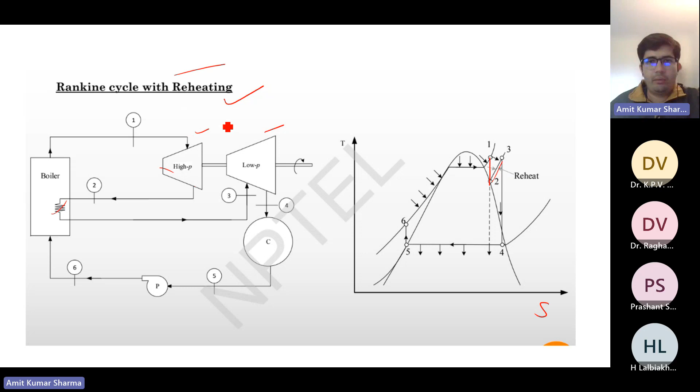So in this way, you can see from 1 to 2, the high pressure turbine is developing work. From 2 to 3, we are again reheating the steam and then again we are producing work from the low pressure turbine. So in this way, we are doing reheating at high temperature. So initially we are going from the lowest temperature, but in reheating, in between at some pressure, we are again reheating the steam

and producing the work. So it is having some benefit on efficiency and also for equipment, because suppose if you are coming directly down, then you will be somewhere here. And in this region, you can see there will be more part of water. So this is not good for the turbine and all. So you should be near the saturation region because it will be good for the equipment also. So reheating is having benefit on efficiency and for the parts life.

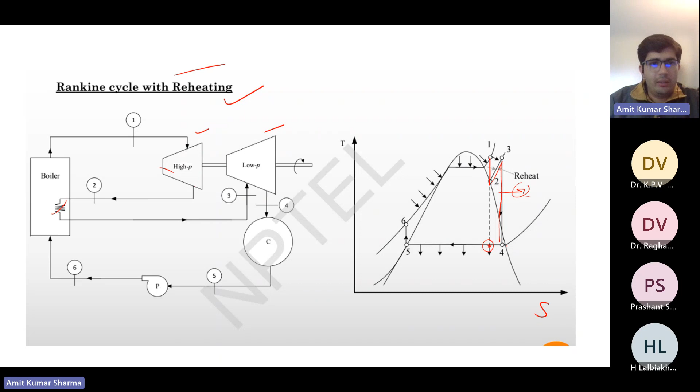So let's come with some numericals. Okay. So the first one is: choose the correct option regarding the combined cycle for the maximum efficiency. So we have to choose the correct option regarding the maximum efficiency. Yeah. So take 2 minutes and come with a good reasoning for your answer.

So the first option is the heat rejected by the topping cycle is the heat supplied to the bottoming cycle. The heat rejected by the bottoming cycle is the heat supplied to the topping cycle. More work is done by the topping cycle. More work is done by the bottoming cycle. Maybe you can link up with the answer. Option C, sir. Option C. Okay. We will come to discussion. Just wait for a moment.

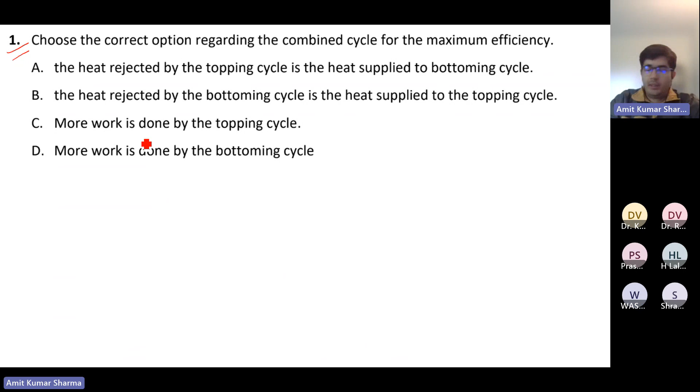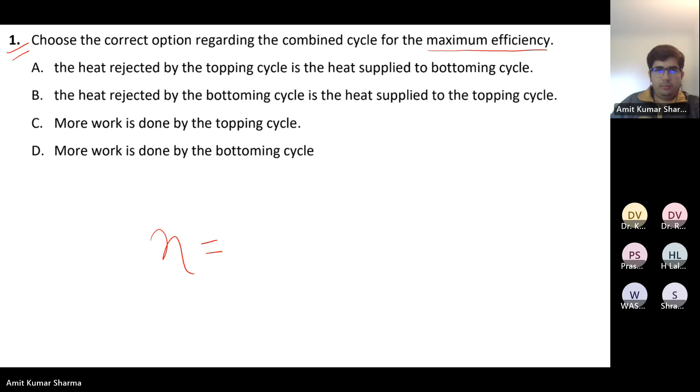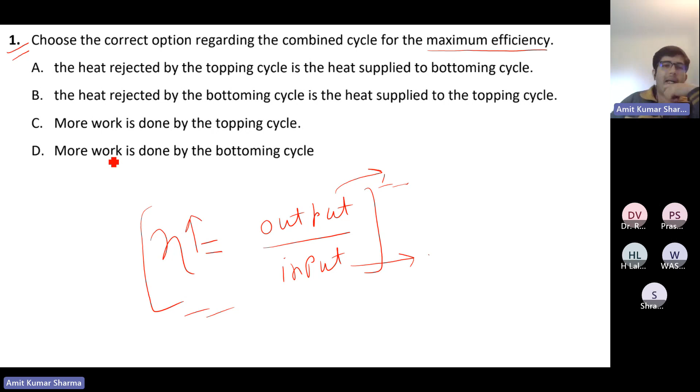So what are the ways to increase the efficiency? What is the basic meaning of efficiency? Anyone? Output upon input. Yeah. So the very basic definition of efficiency is output upon input. So it says that we have to increase our output with the input. So if I want to increase my efficiency, either I can increase my output, then my efficiency will increase, or I can decrease my input, then my efficiency will increase.

So we are having two options. Either we can increase our output, or we can decrease our input, or we can do both. Then it's a good thing. Okay. So basically efficiency is saying how much output we are getting from our input. So we have to maximize efficiency. It means that we have to increase the output work and we have to decrease the input.

So anyone want to answer? Anyone else have any options? We are having one answer as option C. Anyone else having any option in their mind? Please let the class know. A, sir. Option A. Okay. So we are having two answers, A and C. So let's come with the first answer, C. Please explain your reasoning for answer C.

Sir, the more work done by topping cycle means the main turbine is there, the main turbine is high pressure and high temperature. So getting more work done from the topping, in the main HP turbine. Okay, so you are saying that there should be more work in the topping cycle. Topping cycle I think is the main cycle. Suppose this is cycle 1 and this is cycle 2. Just a simple diagram. So 1 is the topping cycle, 2 is the bottoming cycle. So you are saying that there should be more work done in the topping cycle.

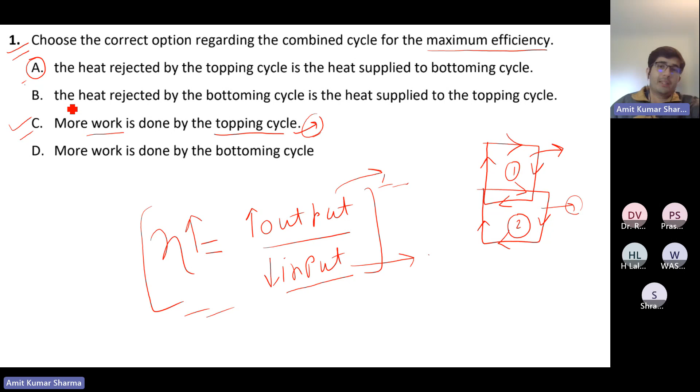But if you are getting more work done in the topping cycle, then it's obvious, because the topping cycle is having some efficiency, that for more output you have to increase the input. Because to increase the efficiency, what are you doing? You are inserting a bottoming cycle. So if you are increasing the work done in the topping cycle, you have to supply more input. Then only you can get more work done, because work is high grade energy. From the topping cycle you want more work, then there should be more input also. So I think this option is not correct. Anyone else?

Okay, now come to option A. Please explain your reasoning why option B or D is wrong, because we have already discussed option C. So who is saying option A? Please explain your reasoning behind B and D, why they are wrong.

My name is Prashant, sir. Actually, what happens in option A is we receive the input in the first complete cycle, which remains constant throughout. For the second, bottoming cycle, no separate input is required; whatever is rejected from the topping cycle is supplied to the second. So there is no input for the second cycle. In this case, we are only minimizing our input, so getting maximum work.

So though there are two cycles, input comes only in the first, the topping cycle, and for the second there is no extra input; whatever we get is from what is rejected. So in that way, I think A may be the right answer. Your answer is very correct, but you forgot to mention the main thing.

This is called waste heat recovery. You explained everything, but you forgot to mention the word 'waste heat.' Actually, I forgot, sir. Yeah, so that is what this class and course is about — maximizing our efficiency using waste heat recovery.

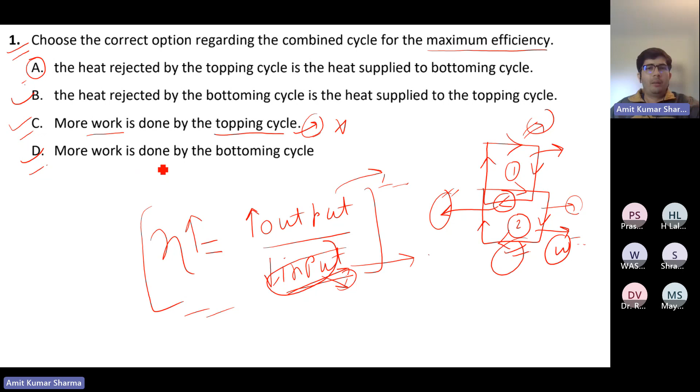As I told you earlier, we can increase efficiency in two ways: either increase output, or decrease input, or do both. Here we keep the input the same but increase output by combining two cycles. So the correct option will be option A, because the heat rejected by the topping cycle is the heat supplied to the bottoming cycle.

Now what is option B? The heat rejected by the bottoming cycle is heat supplied to the topping cycle. That's totally wrong, because the bottoming cycle is totally dependent on the topping cycle. And what is option D?

More work is done by the bottoming cycle. As you know, in the bottoming cycle we are not giving any input, so the work output from the bottoming cycle is limited. We cannot control that — we can only control the input waste heat from the topping cycle. So we cannot say this option is correct, because it depends on the topping cycle.

How much heat is rejected in the topping cycle decides the work output from the bottoming cycle. If we use a bottoming cycle and get any work output, that is our bonus — because if there were no bottoming cycle, you'd have only a single cycle with the same input. But with a combined cycle, any amount of work, say 5% or 10%, that comes extra is a bonus. So there's no question of 'more work' from the bottoming cycle being guaranteed; we cannot control that, that's why we cannot say it.

So the only correct option will be option A. Any doubt?

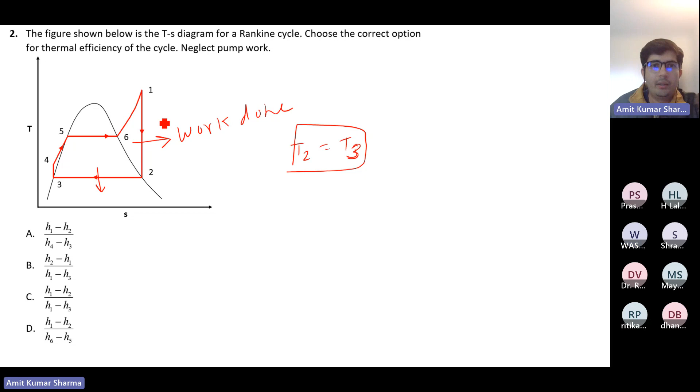Okay, so what is happening here? Is even the heat exchange a heat rejection, sir? Heat rejection is there because at point 2 to 3, point 2 is the vapor phase, and they release the latent heat through the condenser. So this is cooling, and it goes into water, converted to water.

So I was waiting for this point, latent heat. So the vapor is losing its latent heat of vaporization from 2 to 3 and converting to water. So this latent heat is important, so the temperature remains the same. It is required for phase change from vapor to liquid or liquid to vapor. Okay, this is a very important point. So this is heat rejection.

So then 3 to 1 - because we have been given to neglect pump work, this 3 to 4 is basically the pump work, but we have to neglect it. Then what does 3 to 1 represent?

3 to 1, what is it representing? What is the process 3 to 1 representing? It's heat addition, the boiler. Yeah, it's basically heat addition. So this is complete because we have been given that we should neglect pump work, that's why we are considering the complete process from 3 to 1.

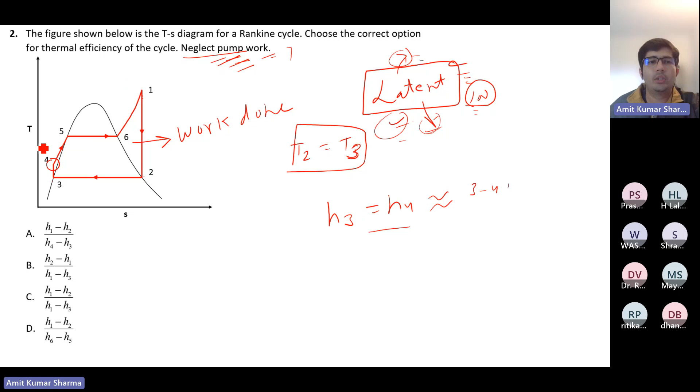But in actual conditions, it should be H4, it should be point 4 only. But it is given in your question to neglect pump work, and there is no option with H4 also. That's why, if there is an option with H4, then you have to consider H4 only.

Because sometimes we have to look at the options also, to see what options we are having. So you can approach it from the options actually.

So the efficiency will be output upon input. The output is the work done from the turbine, and the input will be the heat addition. So output will be the enthalpy of point 1 to 2, H1 minus H2. So see the option with H1 minus H2.

In option A we are having H1 minus H2, and also option C and option D. So maybe option B is directly wrong, because H2 minus H1 doesn't make sense - the enthalpy of this is more as compared to this.

Okay, so H1 minus H2. So the answer could be A, C and D. Now see the input, input should be H1 minus H4. But no, we have no option of H1 to H4. So we have given neglect pump work, so maybe we can consider H3 equals to H4. So replace H4 with H3. So option C with H1 minus H3. Yeah, there is option C. H1 minus H3. So the correct option will be option C.

Any doubt? No sir, I think no doubt. Let's come to question number 1.

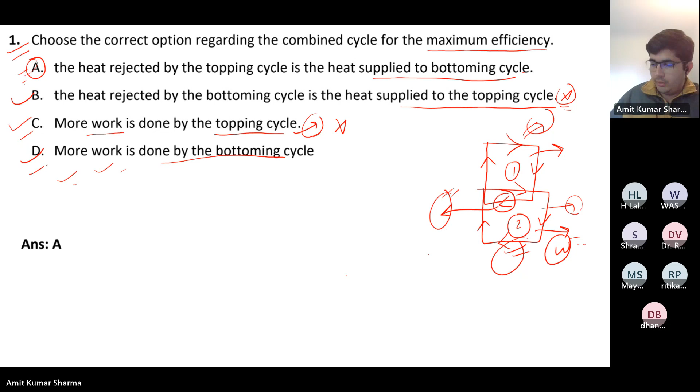If they produce more work, efficiency is more. I think you have to consider, if you are producing more work in topping cycle, because most of the power plants are using this thing only. Let me clear this. As I already said, efficiency is output upon input, so you can increase the efficiency either by increasing the output or decreasing the input.

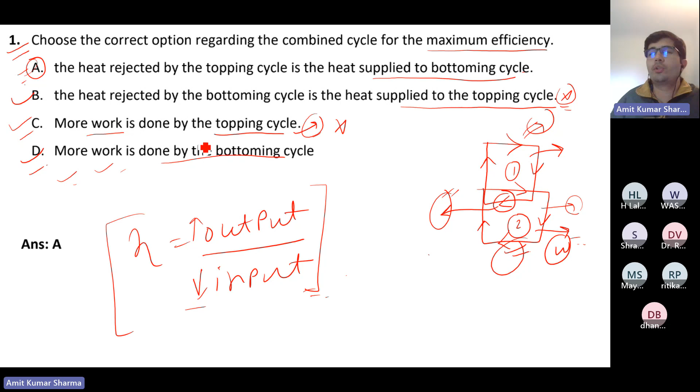So I think you are referring to option number C, that more work is done by topping cycle. Yeah, if you produce more work in any topping or bottoming cycle, efficiency will increase for sure. What you are saying is correct, we can produce more work in topping cycle also, but you have to see the question.

What is the question asking you? The question is clearly mentioned regarding the combined cycle. So first of all, you have to limit your thoughts to the combined cycle only. Now you have to think that you are having a combined cycle, and for that combined cycle, you have to increase the maximum efficiency. Then what can you do? So the best option in combined cycle is to use the rejected heat of topping cycle to supply heat to the bottoming cycle.

Suppose if you are producing, let me go with your option, more work in topping cycle, yeah it's fine. But still there is some heat in the topping cycle that can be used to produce further more work in bottoming cycle. So the question is asking about combined cycle, it's not about only the topping cycle, it's about the combined cycle. So to increase the efficiency of combined cycle, you have to utilize your waste heat, you have to recover the waste heat in bottoming cycle. That's the only way to maximize the efficiency of combined cycle.

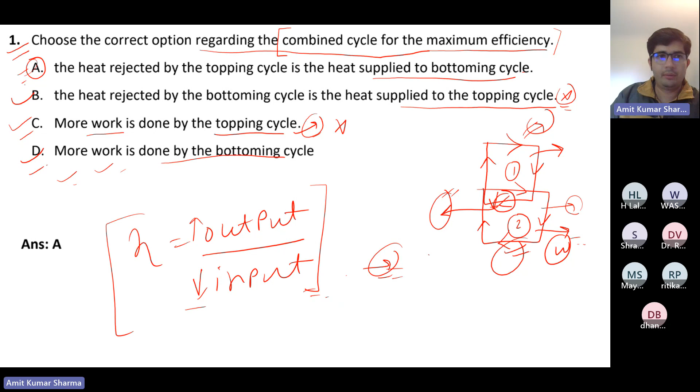Okay. So in this question, answer is A. Okay, so question number 3.

Choose the correct statement or statements related to the Rankine cycle. We have given 5 statements, we have to select the correct one. First is irreversibility causes an increase in pump work. Second is irreversibility causes a decrease in turbine work. The pinch point puts a restriction on the highest achievable temperature. The terminal temperature difference point put a restriction on the lowest achievable temperature. Irreversibility does not affect the Rankine cycle. So take 2 minutes, we will discuss it.

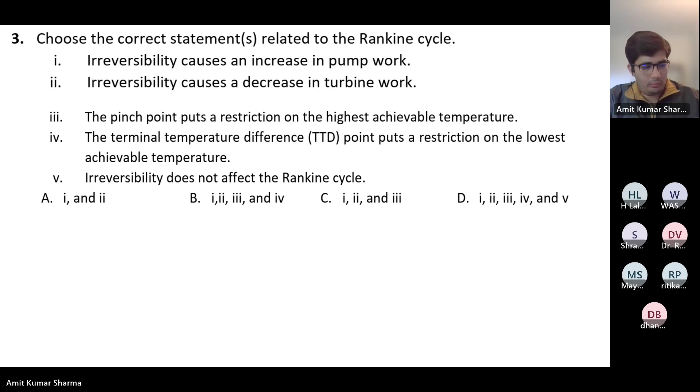So some minimum is required. And for the temperature difference, when the vapor phase is there and you want to fully convert the vapor phase, the size of the condenser increases, and the flow of water also increases. And the fifth, irreversibility does not occur, is wrong. Okay. Correct. Nice.

So the correct option is B, and all your points are correct. So let's discuss it. The first point is irreversibility causes an increase in pump work, because the pump has some efficiency, some friction, some mechanical parts. So there will be various irreversibilities.

If we go for the ideal reversible case, then should the pump work be minimum or maximum? Minimum, sir. Because with the pump we are giving some work, some energy. So due to the efficiencies, due to the irreversibilities, we have to provide more work.

Suppose we want to get an output of 10 kilojoule from the pump; maybe you need to input 15 kilojoule, because the irreversibilities will account for the 5 kilojoule. So you have to provide more work: the more the irreversibility, the more input needed. If irreversibility increases, maybe you have to input 18 kilojoule, maybe 20 kilojoule.

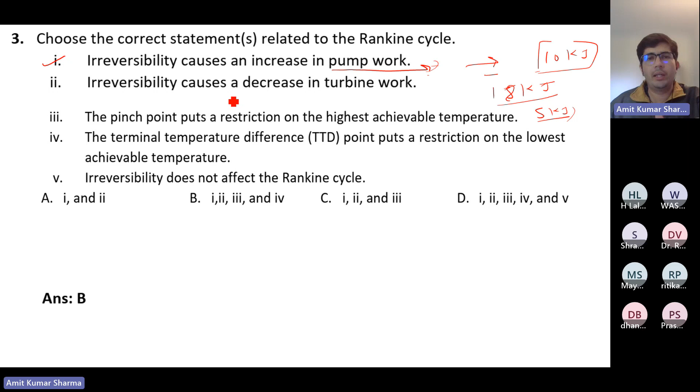So it depends on the efficiencies of the pump. There will be mechanical efficiency, isentropic efficiency, and some other efficiencies depending on the bearings and the frictions; many mechanical parts are there. So it depends on the age of the pump also. Due to those, efficiency will be affected, so you have to take that into consideration. So yeah, option 1 is correct: irreversibility causes an increase in the pump work.

Irreversibility causes an increase in the pump work. Now, irreversibility causes a decrease in turbine work. The turbine is basically the output work. Suppose there is no friction and everything is reversible, there is no loss in the system. Then we will get, suppose, 10 kilojoules.

But we are using some mechanical equipment, so there will be friction. Each component has its own efficiency, every part has its own limitation. Due to these limitations, due to these irreversibilities, we will get only 8 kilojoules, maybe 7 kilojoules. So we are getting less work. Due to irreversibility, the work output is decreasing. So irreversibility causes a decrease in turbine work.

The pinch point puts a restriction on the highest achievable temperature. The pinch point is basically a minimum temperature difference that will always be there. Suppose this is the heat transfer diagram. There is a point, the pinch point, which is the point of minimum temperature difference. You cannot go beyond this difference. So it puts a restriction on the highest achievable temperature; we can go up to that point only, so our heat transfer will be limited.

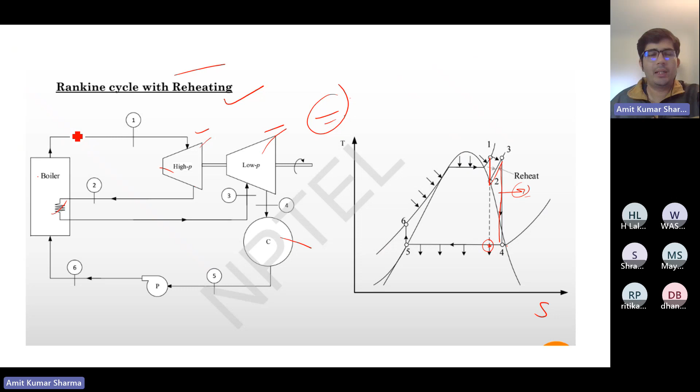If you remember, we discussed at the start the Rankine cycle with reheating. There is a high pressure turbine, a low pressure turbine, a condenser, and a boiler. So in this way, we are representing this cycle in the TS diagram.

So the 1 to 2. This 1 to 2 is the work production in the high pressure turbine. Expansion in the high pressure turbine. Yeah. So 1 to 2 option, expansion in the high pressure turbine. Yeah, this one. So 1 to 2 will go with the 4.

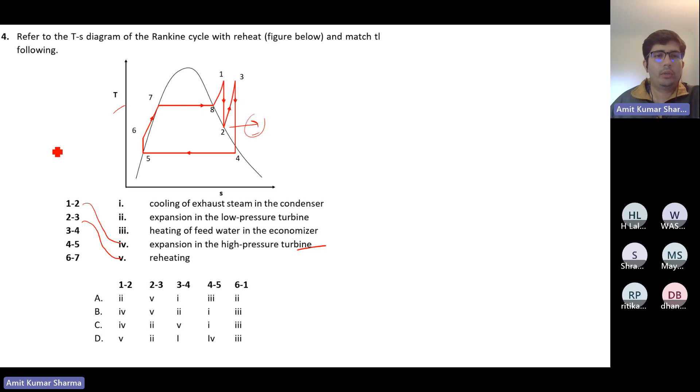Then 2 to 3. Again, you can see the temperature is increasing from 2 to 3. So it means that we are reheating it. We are increasing the temperature from 2 to 3 again, so 2 to 3 will be reheating. Then 3 to 4. Again, we are expanding the steam to produce work. It will be in the low pressure turbine. So 3 to 4 will be expansion in the low pressure turbine. Okay.

Then come to the 4 to 5. As we have discussed in our previous questions, we are converting the vapor phase to liquid phase. So 4 to 5 will be cooling of exhaust steam in the condenser. We are doing the cooling. Then 5 to 6 will be pump work, but we are not having a 5 to 6 option here. We are having 6 to 7.

So 6 to 7 is what? 6 to 7 is heating of feed water in the economizer. So basically this 6 to 7 is the economizer, then there will be the boiler. And completely, 6 to 1 is heat addition, and again 2 to 3 is heat addition. So this 3 to 4, this 6 to 7. Okay, but it's mentioned 6 to 1 here. So you can say it's complete heating, heating of feed water in the economizer.

So option B is matching with all the statements. So the correct option will be option B. Is it clear? Anyone having any doubt?

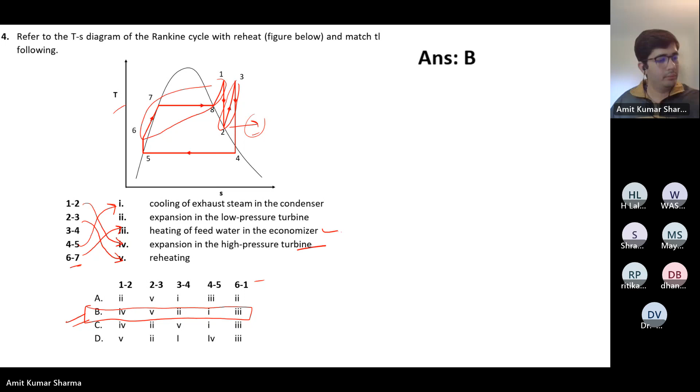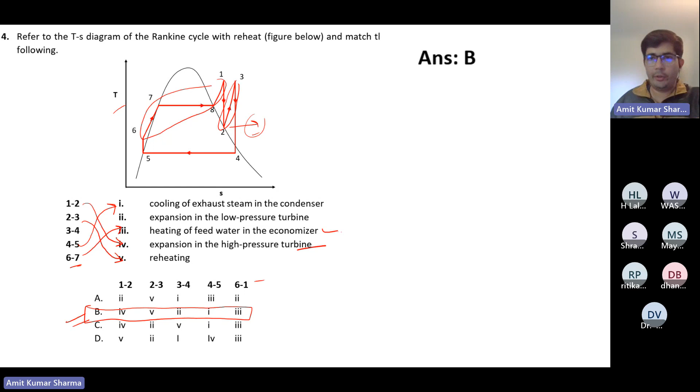Is anyone having any doubt? Okay, I think it's clear to everyone. Am I audible? Yes, sir. Okay, thank you.

Okay, question number 5. Which one of the following is the correct order of fluid flow in a steam power plant? So you have to identify the correct order of fluid flow. Go through all the options. Option D, sir. Option D. Okay. We have two answers. Let's wait for maybe another minute.

So we have to identify the fluid flow in a steam power plant. Sir, D. Okay, option D, we have another answer. So let's see, the correct answer is D. Yeah, you all are correct. We know the fluid flow is: first we do heat addition, then we expand it, then through the condenser, then through the pump, and then again heat addition.

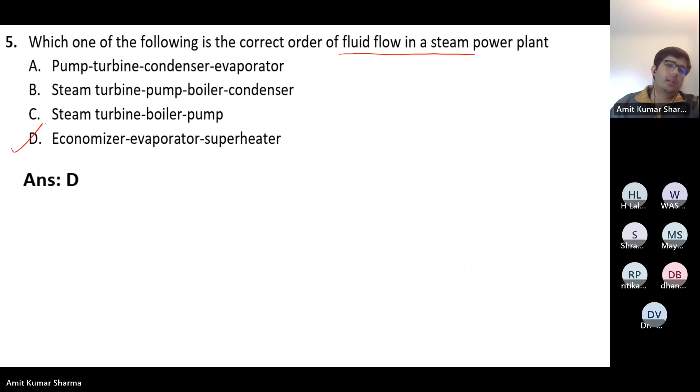Then steam turbine, boiler, no. Without a boiler, how can you generate the steam? So the boiler should come first. Option C is also wrong. Then economizer, evaporator, superheater. It seems correct. So option D is correct. I think it's clear to everyone. Any doubt? Okay.

The open feed water heater is: take 1 minute to answer. Option A, indirect contact heat exchanger; B, direct contact heat exchanger; C, neither direct nor indirect contact; or D, storage type heat exchanger. Direct type heat exchanger. Direct contact heat exchanger. Okay, let's wait a few minutes.

Indirect contact heat exchanger. Okay, so we are having two options, so there is going to be a discussion. Good. Anyone else? So it is B, direct contact. Okay, so we have a third answer, direct contact heat exchanger. We are having 2 votes for B, 1 vote for A. Anyone else? Okay, let's first start with option A. Please explain your reasoning.

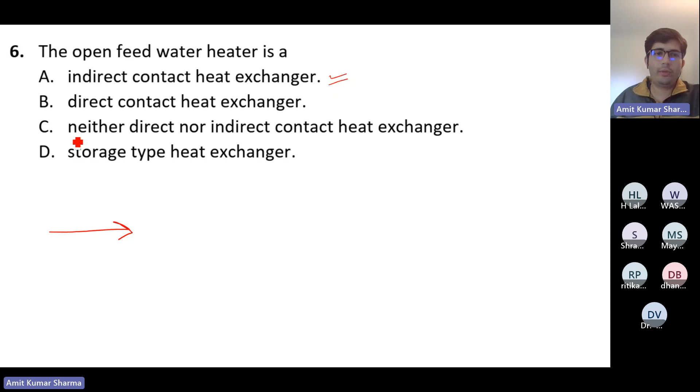Direct contact is a mixing of the two fluids. Is it correct? Yeah, direct contact is simply mixing. So suppose there is a heat exchanger in direct contact, because there is a stream of fluid A and one stream of fluid B. Fluids are in contact. So A may be at high temperature and B is at low temperature.

So in direct contact, you mean to say both stream A and stream B will mix together, and then there will be stream C. Is it correct? Yes, sir. Okay. And in indirect contact, stream A is flowing through some pipes, or stream B is flowing separately. So they are not mixing in between the heat exchangers. After that, there will be maybe some connection to mix those. So for the heat exchanger area, suppose in this area heat is exchanging, it means there is no contact between stream A and stream B in indirect contact.

So the meaning of indirect here is that the heat is exchanging, because the hot stream is releasing its heat to the cold stream. So the hot stream is losing temperature, the cold stream is gaining temperature, but there is no direct contact between them. They are going through their separate pipes, or maybe tubes, or maybe some other mechanism.

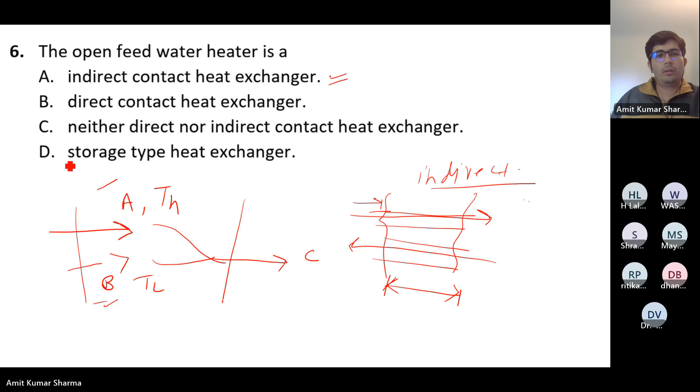But in direct contact, suppose this is the area of our concern. So in this area, the heat exchange is taking place. So what is happening here? Both stream A and B are coming here, and they are mixing together. After mixing, there is another stream C. So that is the result of the heat exchange. So they are directly coming in contact. So that is direct contact.

So here it is mentioned open feed water heater. So basically there are two types of feed water heaters, maybe multiple types, but I think we have discussed two types in the class: open feed water heater and closed feed water heater. So in open feed water heater, there is direct contact of the steam and the condensed liquid. So basically the hot stream and the cold stream will be in direct contact. In closed feed water heater, there will be no direct contact, there will be indirect contact.

So they will be passing through either tubes, or maybe one is passing through the tube and another is hitting outside the tube. So there is no direct contact. So that is the closed feed water heater. In open feed water heater, there will be direct contact. So the correct option will be option B. Any doubt? Okay.

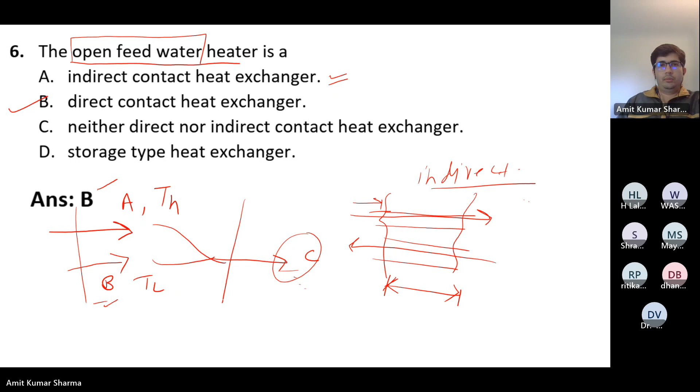Choose the incorrect statements. So you have to choose the incorrect statements. Those who are new in NPTEL classes, if any question is like this, it's not necessary that only one answer is correct. More than one option can be correct. So you should remember this in your exam and in your assignments also. The motive is that you should know the reasoning for every right answer and every wrong answer. So you should understand why the answer is wrong and why the answer is right.

So suppose you are going through the options and you see option A is correct. You directly mark option A. That's correct, but maybe option D is also correct. Maybe there are two answers, A and D, but sometimes it will not be mentioned in the question whether it's statement or statements. Here it is mentioned as incorrect statements. So more than one answer can be correct, and even if in some question it is not mentioned, more options can still be correct. Go through the options, take 2 minutes, then we will discuss.

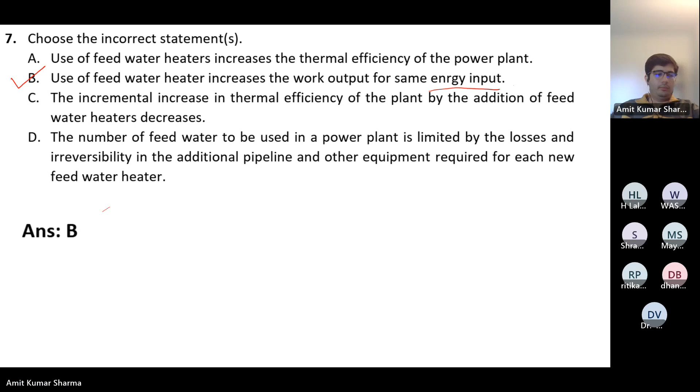I think in option C we have already explained it. So option D is also a correct statement. Okay, so the correct answer will be option B only. So the incorrect statement is only option B. Anyone having any doubt? Okay.

So choose the correct statements for reheating in the Rankine cycle. So take 1 or 2 minutes. Option A is it has the benefit of getting high quality steam at the condenser inlet. Option B, it always increases efficiency. Option C, it increases work output. Option D, none of the above. Let's take 1 more minute, go through all the options.

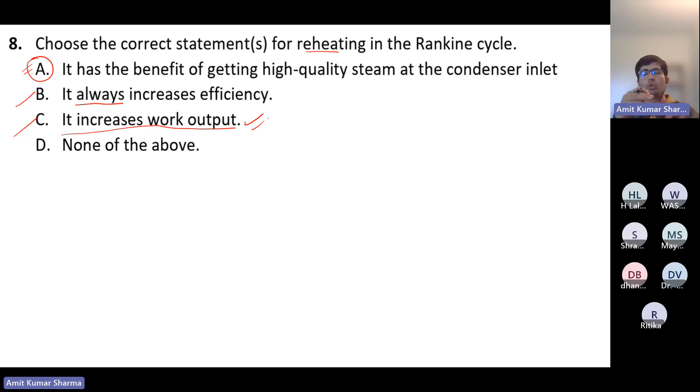Okay, now come to option A. Sir, I think everyone knows the answer, but they are just confused about the high quality steam. They are confusing that high quality steam is only steam or superheated steam, but that is not the case. So let me draw a simple diagram.

Suppose this is point 1. Okay, so it is without reheating. If I use the turbine for expansion, suppose I am using the ideal case, so it will come here. Suppose this is point A. Now I am doing some reheating. Then what will happen?

Sorry, let me just redraw it. Suppose this is point A. Okay, so I'm directly coming to the expansion, so this is the point we are getting. So if I'm not doing reheating, I'm coming from point 1 to point 2.

Now, if I am doing reheating, what is happening? I'm expanding it here, then again reheating, then I'm coming to point 3. I'm again doing expansion, and I'm coming to point 4.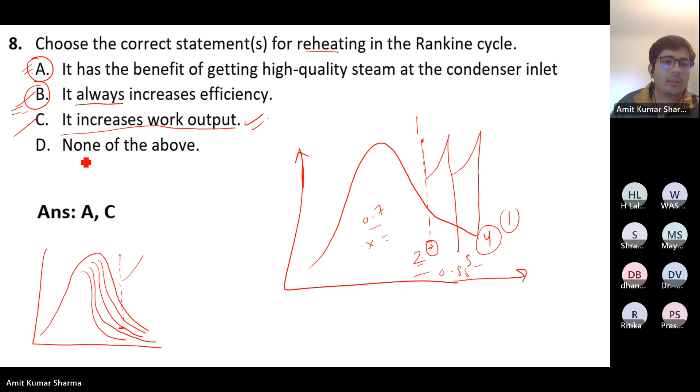Okay, so if you are doing the reheating, in one case suppose your point is at 1. Yes, sir. So you are not doing any reheating. Then what will happen? Maybe you are coming up to this point. Okay, maybe this curve may be the same, 0.7. Now you are doing some reheating. Then where are we coming? Here. So what is happening at this point? Is the dryness fraction increasing or decreasing?

Sure, if you are again reheating, you are coming at the saturation curve. What is happening here, you can see now. So the dryness fraction will increase. You can say directly. Okay, means dryness fraction depends on condenser inlet temperature. Okay, thank you. We are looking at the condenser inlet temperature, so we tried so that there will be less moisture at the inlet. Yeah, I understood. Okay.

Yeah, anyone else? Anyone have any idea why we are focusing so much on the moisture? Suppose the condenser... let me complete. As we are already converting the steam into liquid in the condenser, then why is the quality of steam important at condenser inlet? Anyone want to focus on that? Why are we focusing on the quality of steam at condenser inlet? I am saying again and again that there should be less moisture at condenser inlet. Why so? What is the reason?

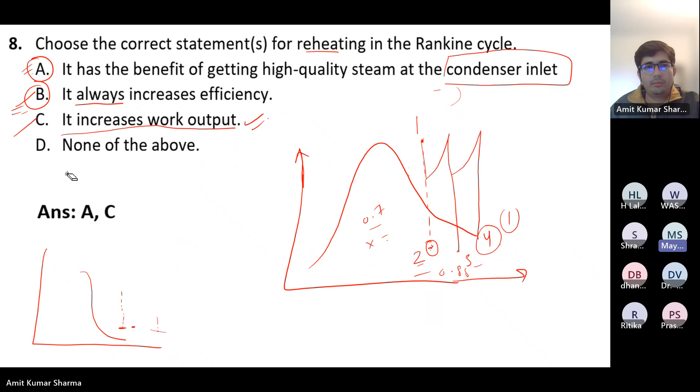Yes, sir, because the condenser itself is a kind of heat exchanger. So we have to maintain some temperature difference between the incoming cooling liquid, like seawater or whatever cooling water it is, and the incoming steam. There must be some temperature difference so that the heat transfer can take place.

I don't think so, because in the condenser we are converting it to completely liquid. So suppose at the condenser inlet there is less moisture, but what will be the condenser outlet? That is completely liquid. So what is the reason behind less moisture at condenser inlet? You are getting my point? You are saying that is correct in that manner, but I am asking why the quality of steam is important at condenser inlet. Why are we focusing on that part?

Because in the condenser, at last what is happening? Suppose the condenser is 10 meters long. So at the starting point, 0 meter, there is no moisture. But what will be there at the end of the condenser? There will be completely liquid. So basically the 10 meters is having some part liquid, some part moisture. Only at a particular point there will be steam. After that, suppose the dryness fraction is 0.9, meaning there is moisture. At 0.8 there is moisture. So the complete condenser is having some moisture, and also we are flowing cold water outside. So why is the condenser inlet steam quality important?

It's a very good point. Yeah, anyone wants to address it?

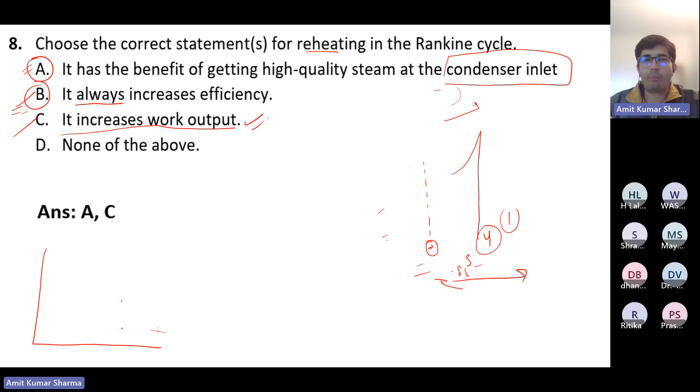Sir, due to avoiding the corrosion problem in the tube, at the turbine outlet.

Yes, that's what I want to hear. Turbine outlet. Actually, we are not focusing on condenser inlet, we are focusing on turbine outlet. But we are saying condenser inlet, because if there is moisture at the turbine, what will happen? That moisture particles will damage the turbine blades. Because turbine blades are rotating at very high RPM, and if some water bubbles are there, those water bubbles will strike the turbine blades. You can see the complete detail in some reference book. So that can damage the turbine blades.

So sir, it will cause pitting and corrosion. Yes, pitting and corrosion. So that is the point. So turbine blades will get damaged. We are focused on turbine outlet, but we are saying condenser inlet, because the condenser inlet is the point of turbine outlet. I think now it's clear to everyone.

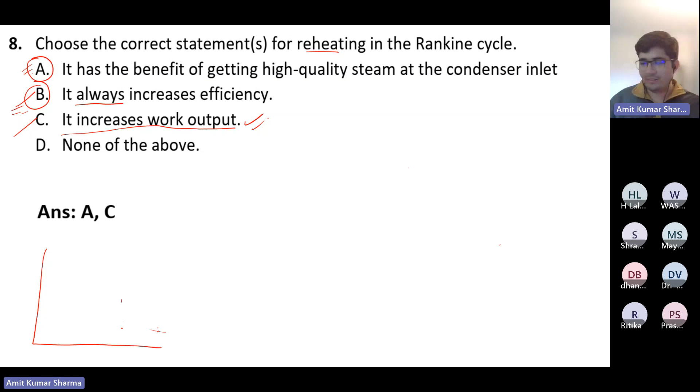So a quick numerical. Given below is a Rankine cycle with reheat. The table below gives the properties of the working fluid at important points. Point 5 corresponds to a saturated liquid coming out of the condenser at 10 kilopascal. Steam enters the high pressure turbine at 15 megapascal. The specific volume of saturated liquid at 10 kilopascal is 0.00101 meter cube per kg. We have given some data. So what will be the pump work?

Take 2-3 minutes and try to answer. Always remember, be very careful with the units, because we are having some units in kilopascal, some in megapascal. Always be very careful with the units. Also, we are having enthalpy in kilojoule. Units are very important whenever you're solving, because in the options you can see option A is 15.139 and option B is 151.39. So there is only a difference of a digit. Similarly for option C and D also. So units are very important.

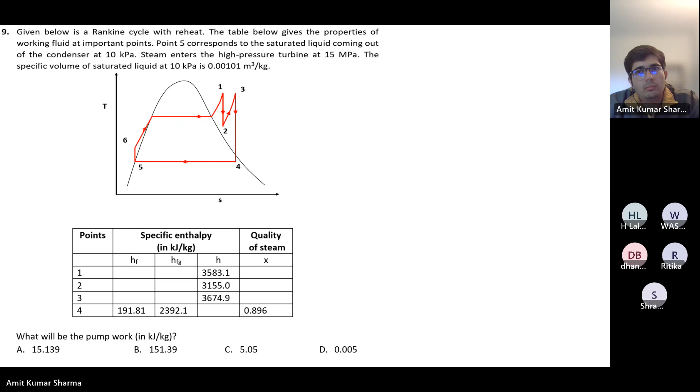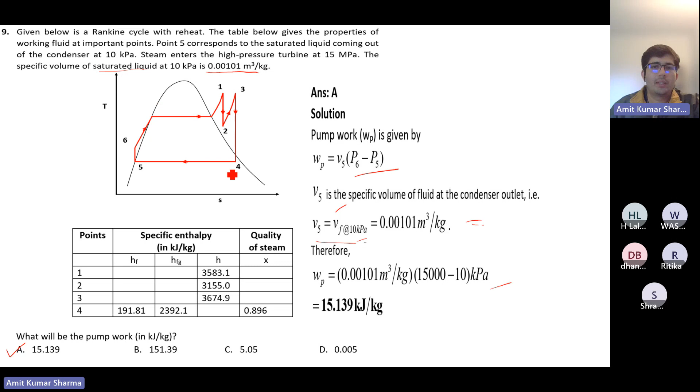Okay, so let's see the solution. Option A is correct. The correct option is option A. So what is the pump work? Pump work will be V5 into P6 minus P5, the difference between the pressure at point 6 and point 5, and the specific volume of the fluid. So V5, we have given VF at 10 kilopascal. In the question, saturated liquid is 0.00101 meter cube per kg. So WP will be V5 into P6 minus P5. We have given the pressures, so put them in kilopascal, you will get the answer in kilojoule per kg.

For detailed numericals on Rankine cycles, you can refer to the class videos. I think professors have solved very good numericals in class also. Anyone having any doubt?

Okay. One important thing is there, because sometimes many students got confused with the steam table. They will see various points are there. Okay, so don't confuse with it. They are asking only the pump work. Okay, so you have to only focus on point 5 and 6.

Don't bother about the table. You don't need it. Okay, you only need point 5 and 6. So only see the relevant data, only find the relevant data and start solving. Don't think about the other things. Okay. Any doubt?

Okay. So consider problem 6. What will be the total heat supplied? Again, the same question. Let me wait a moment. Yeah, same. So now you have to solve the same numerical. Just find out the total heat supplied in this question. Now you have to use the table, because now you have to focus on which points.

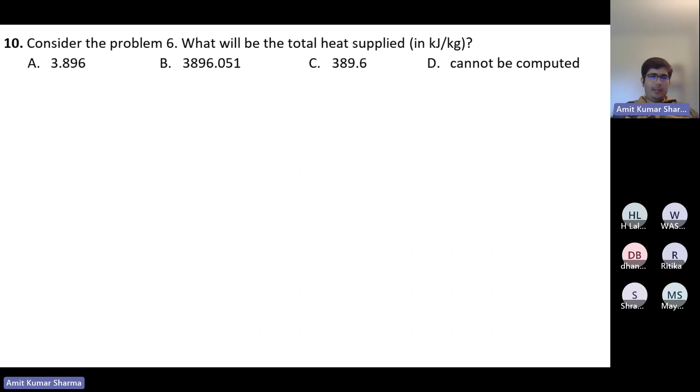We have been given the enthalpy of states 1, 2, and 3. We can see that the enthalpy of state 6 is not given, so we have to find that. For enthalpy at 6, first we need to find the enthalpy at 5. Enthalpy at 5 plus the work of the pump gives enthalpy at 6. Enthalpy at 5 can be found from the curve because we know that 5 is at the saturation point.

So H5 is that of the saturated liquid at the condenser outlet, the enthalpy of the liquid at 10 kilopascal. It will be 191.81 kilojoule per kg. And we know the work done. For H4 we have given HF, but H5 we know is at the point on the curve, so H5 will be the HF that we have given here. So H6 will be 191.81 plus the pump work.

So it will be 206.949. Okay, so now we have H6, and we have H1, H3, and H2 already. So the heat addition will be H1 minus H6 plus H3 minus H2. That will come to 3896.051 kilojoule per kg. So the correct answer is option B. Anyone is having any doubt? Okay, I think there is no doubt.

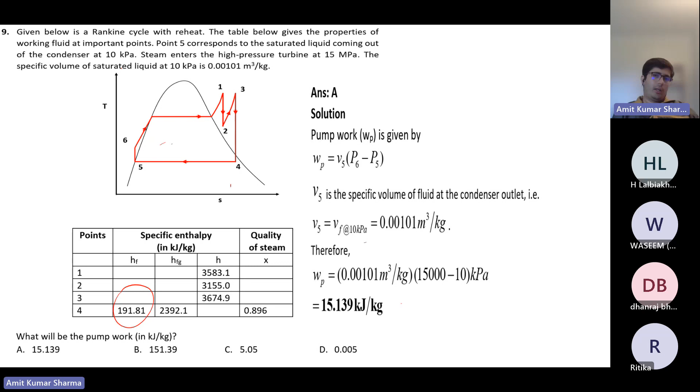Yes, sir. Okay. So question number 11, again consider the same problem. What will be the thermal efficiency of the cycle? Now you have to find out the thermal efficiency. I think you have found out the heat addition. For thermal efficiency, you need to find out the work output. So consider points 1, 2, 3, 4 and find out the work output from this data. After the work output, you can find out the efficiency. You know the pump work, you know the heat addition.

Take 2 minutes to solve. This one question has 3 questions, okay? With the same data, we can solve 3 questions. So it's good to practice these types of questions, because you have to be aware of them.

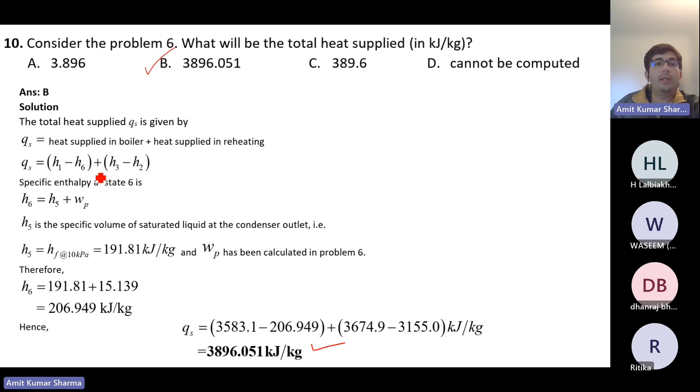So let's see the solution. Thermal efficiency is the net work output upon the total heat supplied. We computed the total heat supplied in the last problem: 3896.051 kilojoule per kg. Now the net work output. The work output will be the output from 1 to 2 plus 3 to 4 minus the pump work 5 to 6.

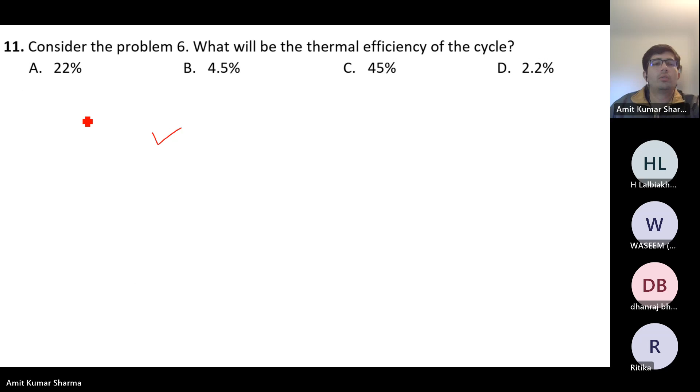So it will be WT1, high pressure turbine, plus WT2, low pressure turbine, minus pump work, where WP is the pump work. So W net will be H1 minus H2 plus H3 minus H4 minus WP. Enthalpy H4 will be HF at 10 kilopascal plus X4, the dryness fraction, times HFG. So we get the enthalpy 2335.1316. Then W net will be 1767.87.

So you have the net work output and the total heat supplied. The answer will be 1767.87 upon 3896.051, which comes to 45%. Okay. Yeah. Come to the next question.

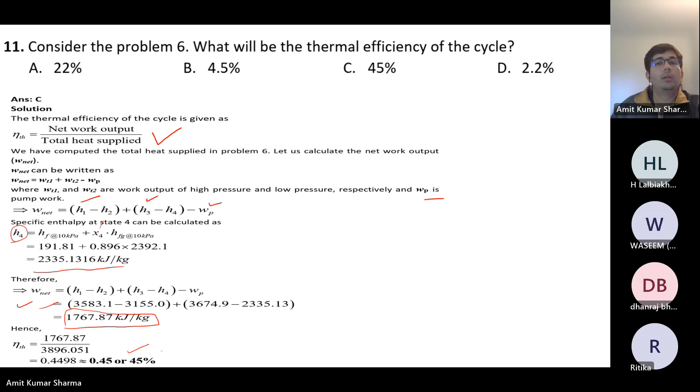In an adiabatic turbine, the steam expands steadily. The data is given in the figure. What is the power output of the turbine in kilojoule per kg? Note the inlet and outlet of the turbine are at the same datum. Same datum means you have to consider the potential energy as 0.

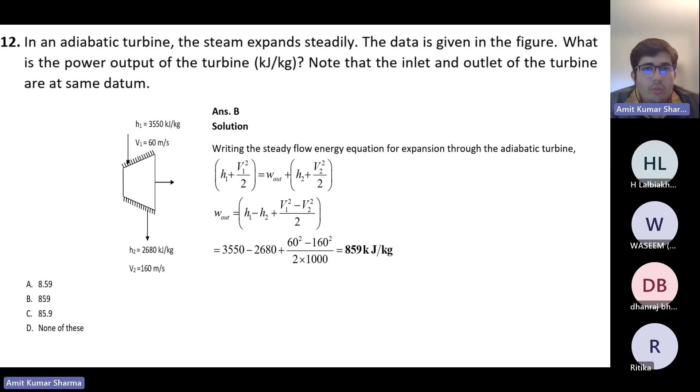So we have to first write the steady flow energy equation for expansion through the adiabatic turbine. That will be H1 plus V1 square by 2. We have to consider the kinetic energy because we have been given the velocity at inlet and outlet, and the enthalpy and the work output. Okay, so W out; it's adiabatic, so there is no heat loss, so Q will be 0. So put in the steady state equation, you have all the data.

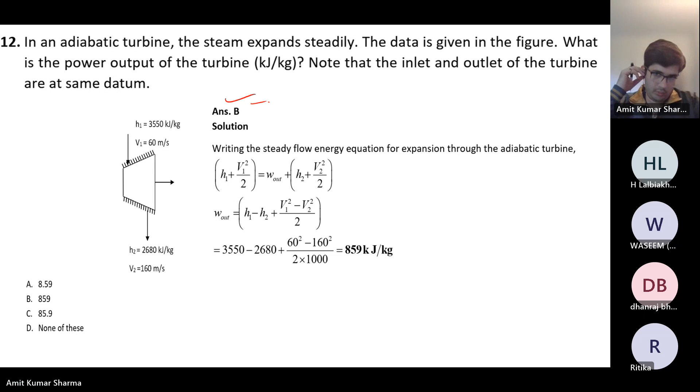So W out will be H1 minus H2 plus V1 square minus V2 square upon 2. The answer will be 859 kilojoule per kg. So the correct answer is option B. Is it clear? Okay, I think it's clear to everyone.

Question number 13. The figure below shows the TS diagram of a steam power plant based on a Rankine cycle. Find out the back work ratio. We have been given state points, specific enthalpy points. You have to find out the back work ratio. What is back work ratio, sir? Okay, is it not covered in the class? Okay, maybe it is not covered. Maybe it will be in the reference book.

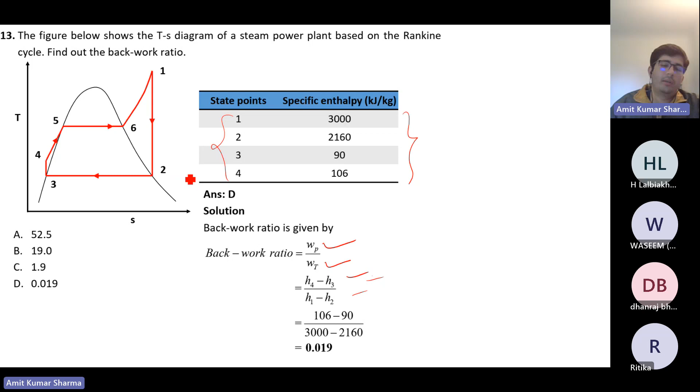So let's see. The back work ratio is the ratio of the pump work and turbine work. So pump work will be H4 minus H3 and turbine work will be H1 minus H2. So you know all the enthalpies at the points. Just put the data in this formula. So the back work ratio is 0.019.

So should our aim be for the back work ratio to be lower or higher? What, sir, is our motive? Lower. Lower, yeah, because we require more turbine work and very less pump work.

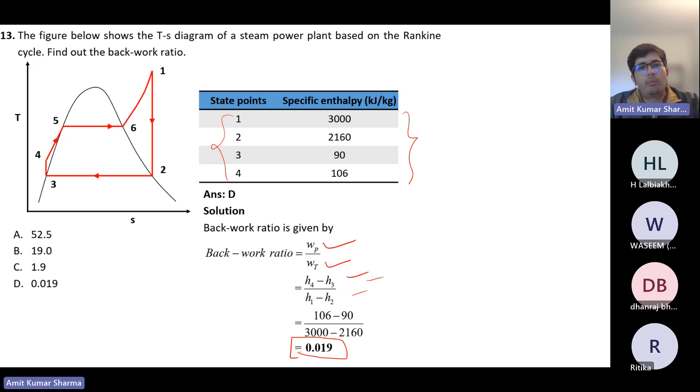Okay, we'll come to question number 14. In a power plant, the steam enters and leaves an adiabatic turbine steadily with specific enthalpies. If the expansion had been isentropic, then steam would have left the turbine with a given specific enthalpy. Find out the isentropic efficiency of the turbine. So you have been given some data regarding the turbine. So calculate the isentropic efficiency.

I think these are the numericals. So that's why I was telling you, try to cover all the previous week classes before this live session, okay? Because it will be more helpful for you to solve the questions, and to ask doubts also.

So basically, isentropic efficiency means, in actual operation, we know that turbine work will be lesser than the isentropic work. So there is an efficiency. You have to find that out. So you should first know the efficiency formula for the isentropic turbine, and you have the points.

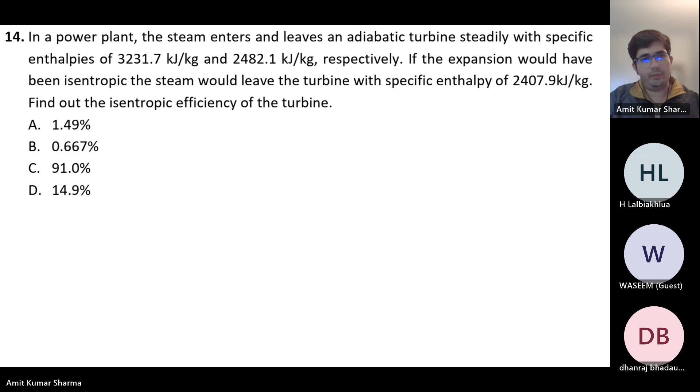Okay, let's see. So the efficiency of the turbine is written as: suppose this is the turbine work from 1 to 2s. So 1 to 2s will be the isentropic work, and 1 to 2a will be the actual work. The actual work will be lesser than the maximum work. So the turbine isentropic efficiency will be actual work upon isentropic work.

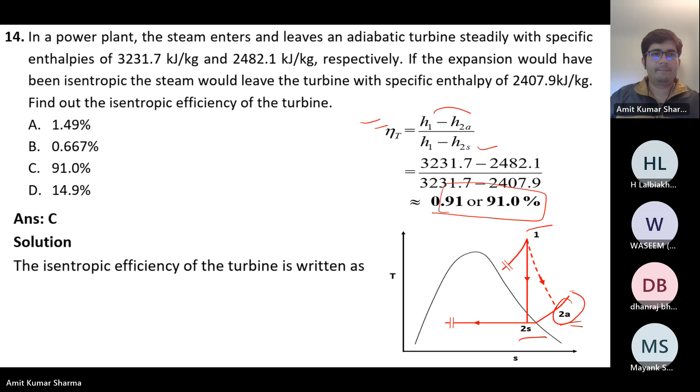So H1 minus H2A, this 2A point will be the actual point. So H1 minus H2A upon H1 minus H2S. Okay, so you have all the data. Put the data and you will get 91%. Okay, is it clear? Okay.

So the last question for today's class. A steam power plant operates on an ideal regenerative Rankine cycle with an open feed water heater. Steam enters the turbine at 10 megapascal and 600 centigrade and is condensed in the condenser at a pressure of 5 kilopascal.

So we have been given all the data. It's quite long; I think it will take time. So maybe we can directly see the solution, because the class time is about to end. So let's see the solution.

So we have to, because we have given, you can see we are using some steam extraction at some points. As we are extracting steam at point 2, suppose the M1 quantity was coming here, so maybe M2 is going here. Then the remaining quantity is coming to 3 to 4. So we have to consider all those things and calculate the data.

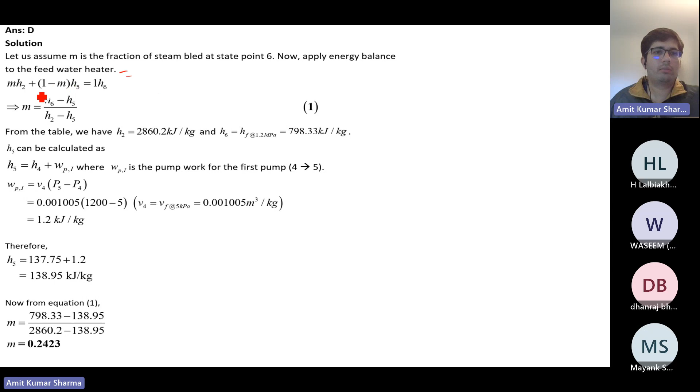So let us assume M is the fraction of steam bled at state point 6. Now apply energy balance to the feed water heater: M·H2 plus (1 minus M)·H5 equals 1·H6. So we have to apply the energy balance equation at the feed water heater, and based on that we can find the value of M. From the table we can get the values of H2 and H6. H5 we can calculate from this formula.

H5 equals H4 plus WP1, where WP1 is the pump work for the first pump, 4 to 5. Then you can calculate it. So H5 will be this. Put it into the equation, so M will be 0.2423.

So my advice is that sometimes these questions are quite big. When you read it first, it seems like quite a big question. But we are only asking one point: determine the fraction of steam extracted. So focus on that part only, and identify which state points are important for your respective question.

So don't have any fear from this large question, because you will see the table, you will see the diagram, you will get some fear and maybe lose your confidence. So don't do that. Try to focus on the question, read it carefully, focus on what exactly they are asking. Start with the basics. If you have a feed water heater, apply the energy balance.

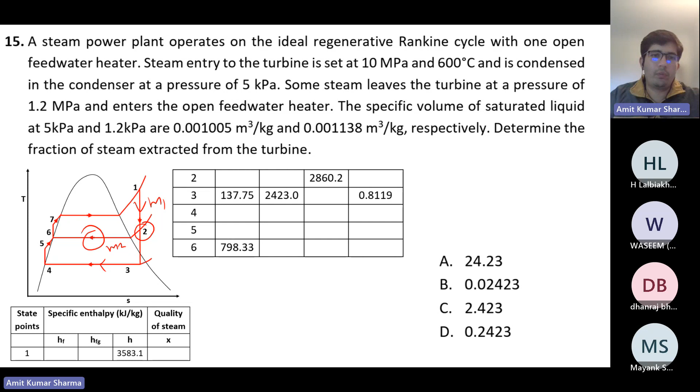So you have applied the energy balance. From the energy balance, you require the enthalpy of state points 2, 5, and 6. For 2 and 6 you have the enthalpy, but for 5 you need to calculate it. How? You know the enthalpy of state 4. If you know the work, you can calculate the enthalpy of state point 5: enthalpy of 4 plus the pump work.

For pump work, you have the specific volume, since the pump is handling liquid, and you know the pressures at the end points of the pump. So you can calculate the pump work by multiplying: V4 into (P5 minus P4). So the pump work is 1.2 kilojoule per kg. Therefore the actual enthalpy H5 will be H4 plus the pump work. It's very slight, only 1.2 kilojoule, but it can make a difference if you are calculating up to 4 digits.

In our earlier question, I think we discussed that we can neglect the pump work. It's very small, 1.2 kJ/kg, so sometimes we can neglect it, but only if it is given in the question. If it is not given, then we have to consider it. So now you get the enthalpy H5, and you can get the mass fraction by putting it into this formula. Initially it seemed quite big and very difficult, but from the solution it seems very easy.

I think, is it clear to everyone? Is it clear to everyone? Okay, I think it's clear.